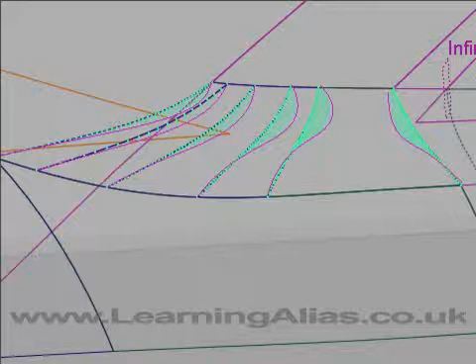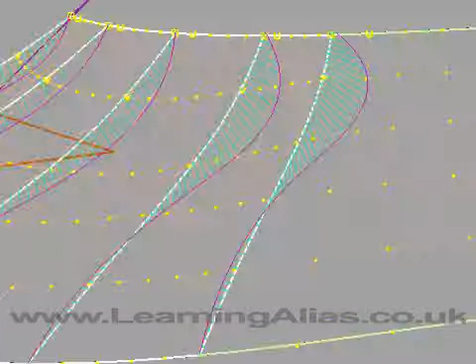Let's take a quick look at this A-pillar blend, and we see that these two curves, 1, 2, and this one are planar, whereas these two are clearly not planar, and this is causing a problem in the blend. I just want to get in close here and show you that this CV hull is quite nice here, but then all of a sudden it starts rising there, and this is causing a problem. So the reason for that is that the CVs on this curve need to be slid down here after the surfaces were built until the hulls were nicely aligned. So it's quite a simple thing to fix.

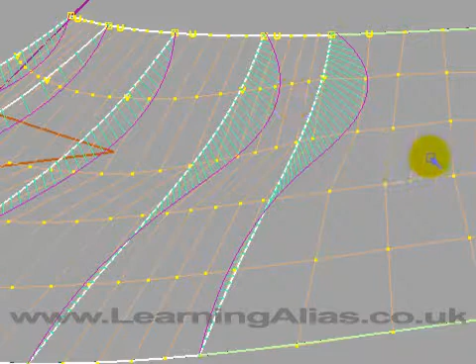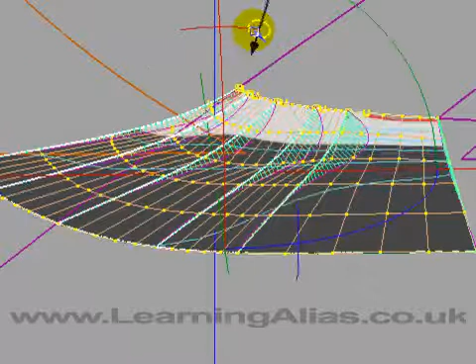Overall it's not a bad blend, and it's acceptable, and let's have a look at it with some dynamic shading on. Let's take a quick look at it with this ISO angle dynamic mode, and you see that generally the visual curves are good. I'll show you where the problems are. Perhaps it's a bit hard here. The curve needs to be a bit softer there.

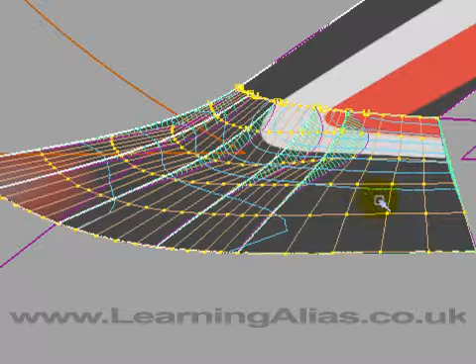So what we're going to do now is take a look at it with the stripes on, and you can see that it's not bad. We can stick with that for the moment. It could be improved to get towards Class A, but it's fine for the moment.

Okay, we're failing in continuity here. We don't have tangency here. We must have a minimum of tangency between this, the cantrail surface, and the A-pillar. This would normally be the theoretical side glass surface. On this car it happens to be a thin strip of the cantrail. So that's just a question of aligning this A-pillar surface to there. Okay, that's a simple job with tangency. Tangency is fine. When we're creating blends, we need tangency.

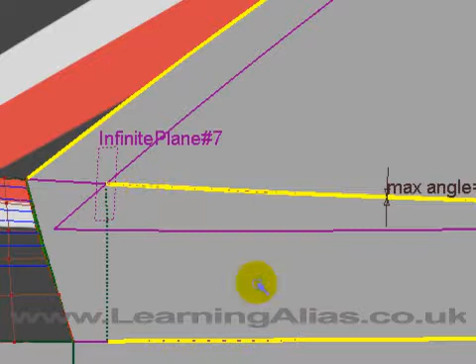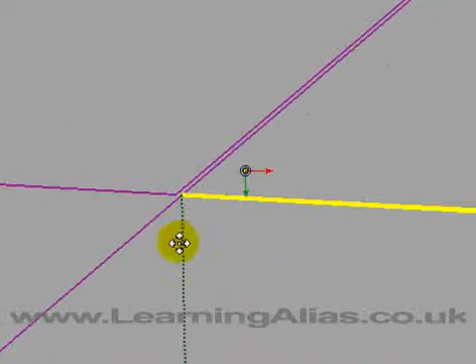And here we need curvature, and we're quite clearly failing in curvature top and bottom. And I'm going to show you now the reason for that and how to put it right. I'm going to zoom in on this point here, and now that I'm in really close, you can see the problem. We don't have tangency there, and in fact we've got a spurious curve on surface which we can delete.

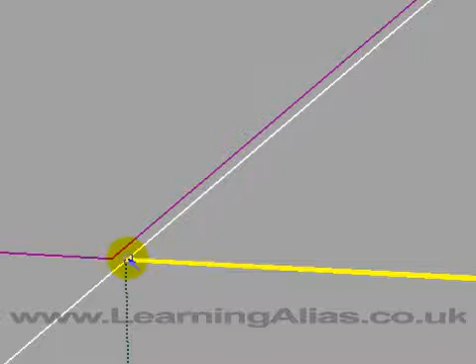And what I did, in fact, I untrimmed this. This is the little thin cantrail surface. I untrimmed that, and then I deleted this curve on surface here. And in fact, also to help with the modeling, I picked this surface here, which is the theoretical side glass, and hid it away, and then brought this curve on surface to there, and then built my vertical curve down from there.

So it's a question of getting in really close and understanding what your curves on surface are actually doing, and where they're causing you problems. A very important thing in Alias is to have really good curves on surface. That's where it all starts. We can see here that the edge of this surface is not planar, so we need to put that right by building a curve there which is aligned and planar.

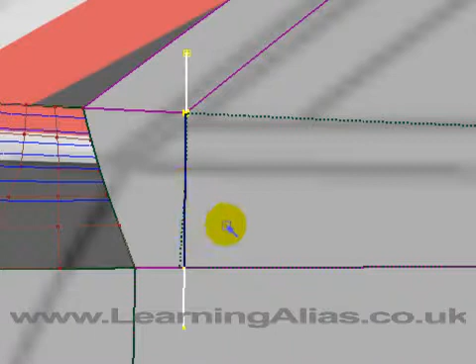Keep an instance of your extend tool in your shelf all the time, which is set to extend linear, merge off, and with an extension length of say 3 centimeters, and use this all the time when you're setting up this type of curve alignment. So that's the new curve aligned G2 G2, and compare it with the original surface boundary, and you see, you know, that's the problem, and that creates a big headache for the system.

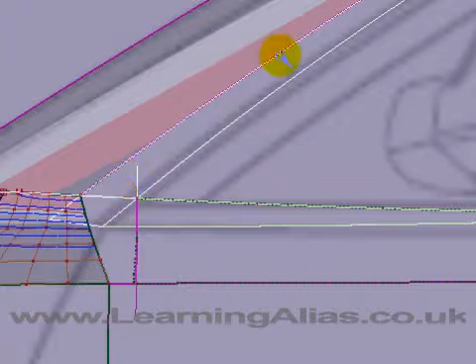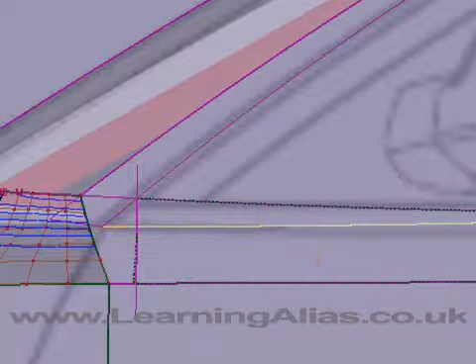Okay, so I've ditched the actual theoretical side glass surface and I've untrimmed this cantrail surface because they are one and the same thing. They're both made from the same rail surface which comes from the barrel revolve surface. Now we don't want spurious curves on surface in Alias. They cause a lot of headaches for the system, so what we're going to do is just get rid of those two curves on surface there, and I think that'll do us.

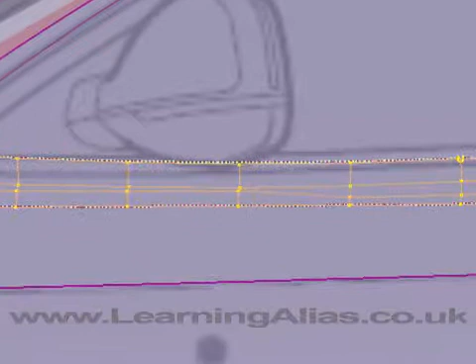We're looking at a surface here which I guess is a free-form blend, and you see that it's only a 1 to 3 degree surface, so it's not really much good, and as you can see, the CV hulls are quite tortured. So okay, how can we improve it? Well, first of all, if we're going to use degree 5 for the A-pillar blend, then usually we're going to build this blend back from the A-pillar, so we want degree 5 here as well. You can use freeform blend and then you can up the degree afterwards to degree 5, but for Class A, generally speaking, I don't do that.

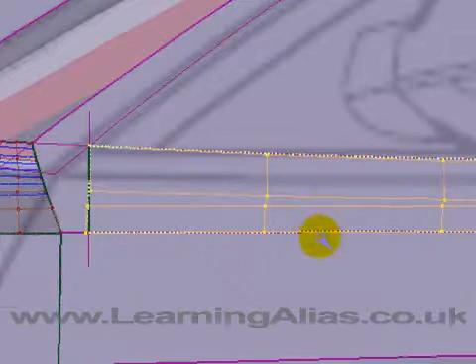I use square surfaces, 5511. Okay, I'm going to put a new curve in here, planarized, and then we'll build that surface, and I want you to see the difference.

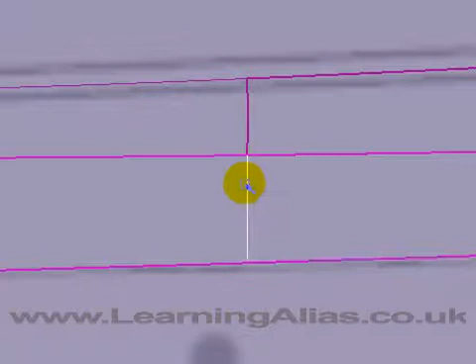If I can just point out that this is the shoulder of the car, and this curve on surface goes right across the shoulder, which is a nightmare in Alias because when you're trimming, it's a great way to lose half your model. So always either project short curves on surface or detach about there where I have my cursor to avoid that.

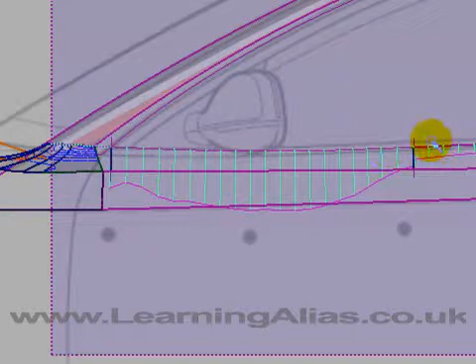Always, before trying to build a line of chain surfaces with G2 continuity, check your curves on surface with a comb before you start, and you can see here that we only have tangency, so that's no good, and here we only have tangency, so that's no good either. So what I'm going to do is reproject this curve on surface here with a new curve, and I'll come back.

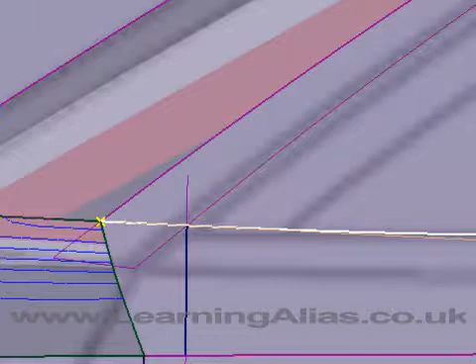I've bypassed this and I've gone all the way over here to the actual blend, so I'm aligning all this to that cut-off on the A-pillar. This is that point at the front corner of the theoretical side glass, and this surface here is the thin cantrail surface, and as you can see, we've got this triangular intersection which is no good, and we've got a small spurious COS there to get rid of.

So what I'm going to do is detach this COS and delete the lower part of it, delete that small one, and then I'm going to build to this, and afterwards I'll project a new curve on surface to that point there. Next thing to do, you see this curve on surface that we're going to join our curve to is too long, so we're going to pick the curve on surface and then just curve snap it to that point there.

That didn't work, so what I'm going to do now is use the detach tool and get it in there. Zoom in nice and close, because doing it once right is better than doing it 2 or 3 times wrong. And then delete the spurious section, and then I'm going to realign the curves to it.

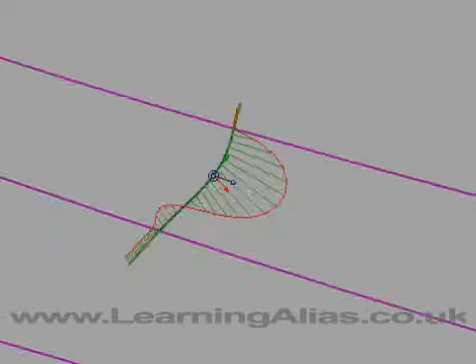Okay, so here are our 3 curves: planar, planar, and planar. Very important. Have a look at the curves, make sure they're looking like they're all playing in the same team, and they are to me. And let's build some surfaces.

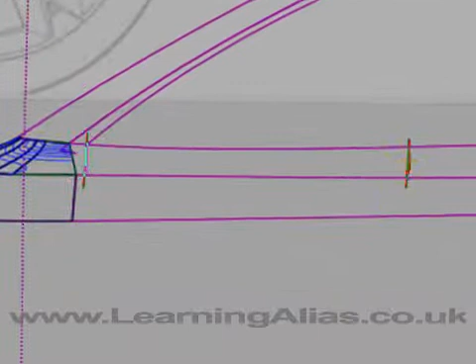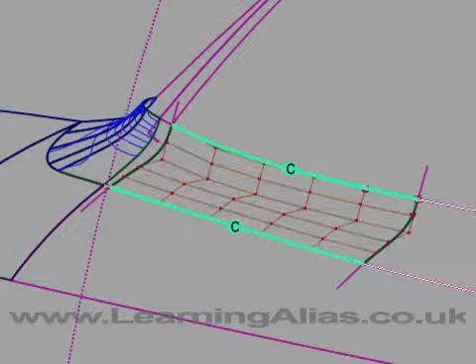Okay, let's build the square 5511. Always check your CV hull. Make sure that it's looking nice and orderly, and we can go straight on now to build the next square. Curve to get better alignment, and put the CV hull on.

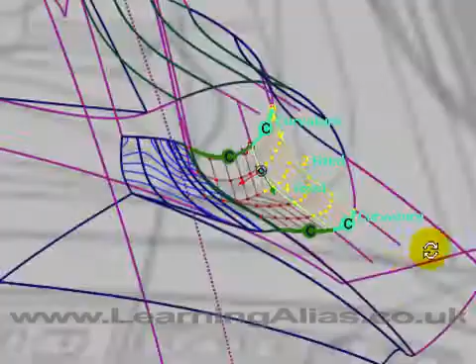So there we are, a few tips on how to get your direct modeled blends to run nicely, and point out some of the problems that are going to get in your way and stop your surfaces from building. So it's all about precision of the exact end point of curves on surface. Intersections must be really precise.

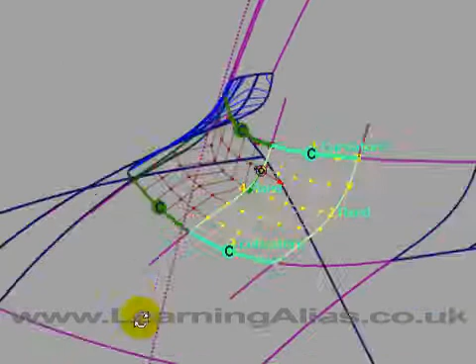Get stuff out of the way that you don't want, like I got the theoretical side glass out of the way, it's just an extra surface, just complicating things. Simplify the playing field. I've got rid of the front screen, I've got rid of all the front of the car, so that I can actually focus on what I'm doing.

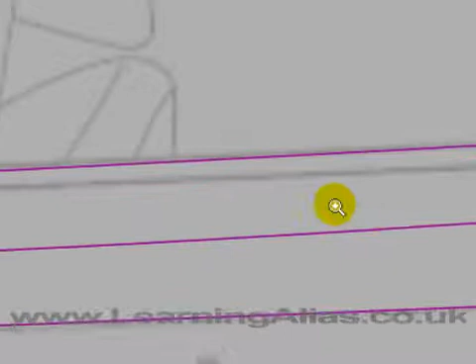There's one more thing I want to show you before I sign off. Rather than aligning a degree 5 curve there and extending, projecting, I'm going to show you a way I often do it using construction planes. My motto in Alias is, if you're not using loads of construction planes, you're not doing it right.

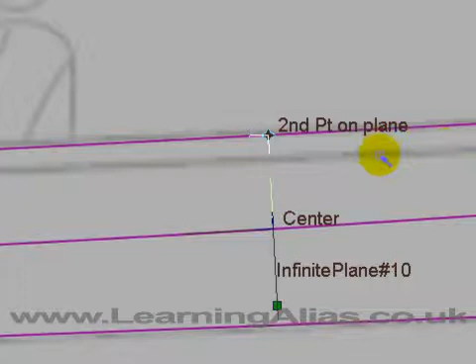So this is a 3-point plane, so I'm going to click it there, and I'm only using 2 of the 3 points, and I'm going for vertical or perpendicular to this line. That's another way to work, perpendicular to one or the other boundaries. Okay, if I pick nothing now, then I have the plane there, and quite often I scale the plane because I like to actually see the plane, see where it is.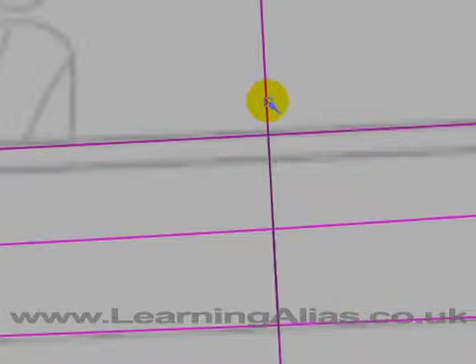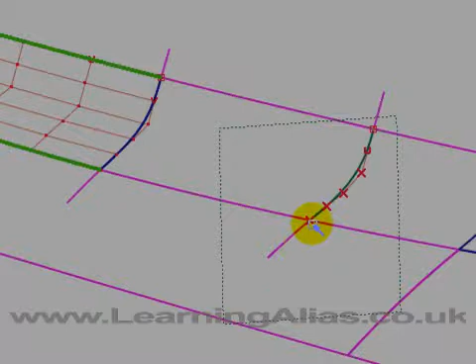I've intersected the plane with the theoretical side glass surface and the shoulder. I'm now going to detach and get rid of the extra length of COS I don't want. So that leaves me with 2 nice curves on surface ready to put my 5 degree. So that's the curve created planar with the construction plane. A great way to work in Alias for precision modeling and good results.

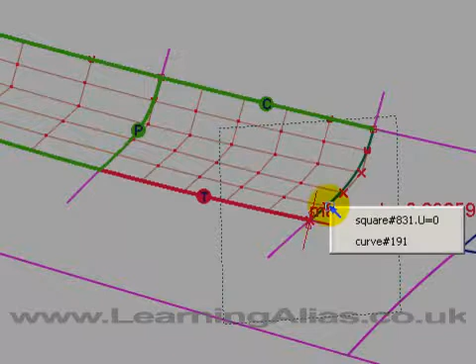Okay, let's build the surface. It just needs aligning, so let's take the align tool. We know it's the curve because it says maximum angle right at that point there, so it's the curve that's driving the problem. So pick the curve, align it, and hey presto.

Well, I hope that you found that useful. Precision. Take your time. Don't be in a hurry to get loads and loads of modeling done. Work really precisely. Zoom in really tight to see exactly what your curves on surfaces and your curve intersections are doing, and then when you come to build the surfaces, that's the easy bit.